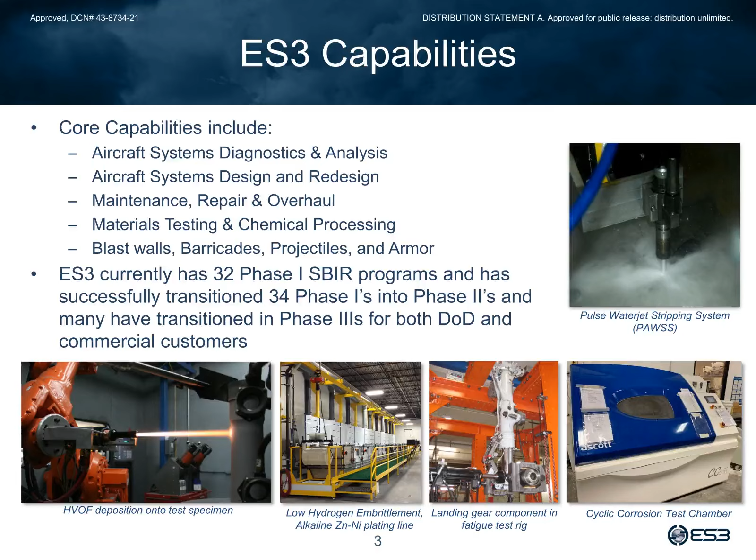SBIR topic N201-X02 is an open solicitation to address the U.S. Navy's need to develop cold spray repair coatings and application techniques for structural and dimensional repair. For those that are not familiar with cold spray, it is a dynamic gas metal deposition process. It is a non-traditional thermal spray process in that it's non-combustion.

It uses kinetic energy to basically ballistically impinge a coating onto a suitable substrate. Metal powders are accelerated by injection into a specially designed nozzle that creates a high velocity stream of gas. And through that kinetic energy, you can actually apply those coatings to whatever targeted substrate you want.

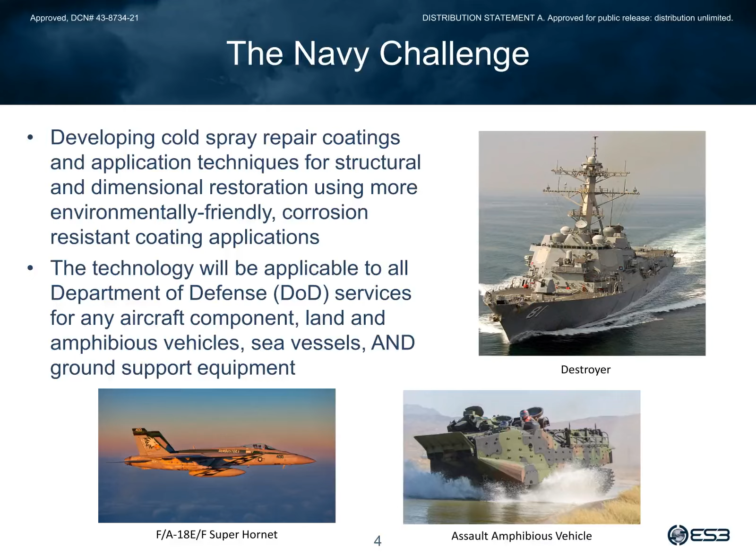This technology is taking the DoD and the commercial industry by storm, and it allows you to make repairs on components that are typically not salvageable.

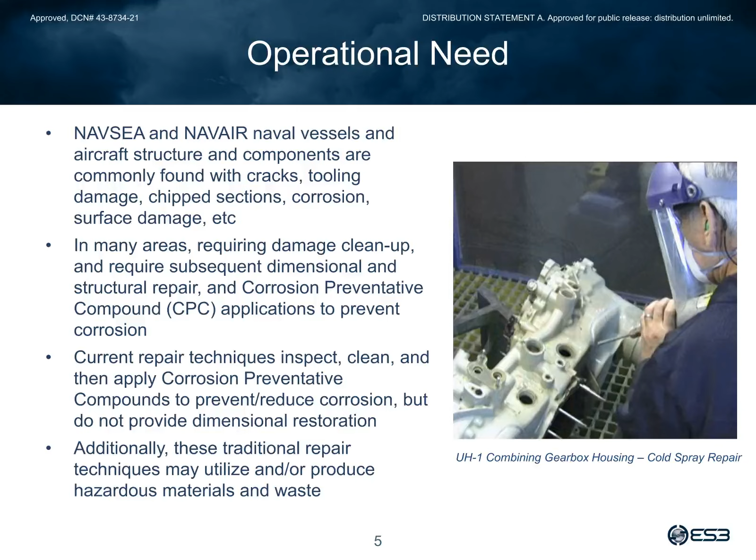This slide lists a few of the operational needs that this cold spray process addresses. Everything from dimensional restoration, structural repair, and even corrosion protection. In many cases, you'll have damage to aircraft components, ship components that require cleanup, and then a subsequent corrosion preventative compound. But you really don't have the means to restore the dimensional or structural integrity of the part. Well, this technique will allow you to do that and do it in a manner that's environmentally friendly.

Now, as we continue to see cold spray application and usage grow within the DoD, we are seeing an increased utilization of gases, particularly helium. Helium has become the primary gas utilized with high pressure cold spray systems as it facilitates increased gas velocity, which allows applications of heavier metallic powders such as your tungsten carbides, your steel alloys, etc.

It also has shown superior performance for application of aluminum powders when you compare it to using nitrogen. This is particularly important as users are seeking to get structural credits from the cold spray application. The problem with helium, it is very expensive, making some cold spray repairs cost prohibitive. And then there's always the risk of having supply issues interrupted with the helium.

To mitigate this problem, ES3 has developed a gas mixing delivery system which will allow the user to combine helium and nitrogen gas, which will thereby reduce helium usage and still maintain good performance on your coating.

The slide shows a photo of the system that we designed and developed that can be used as an external delivery system with any user's cold spray system. The system has automated controls and HMI that allow the user to simply punch in whatever desired mixture ratio they want and then go to their respective system and turn it on. Now, this is a floor model that is shown, but this can easily be augmented into a portable system that can go out into the field as well.

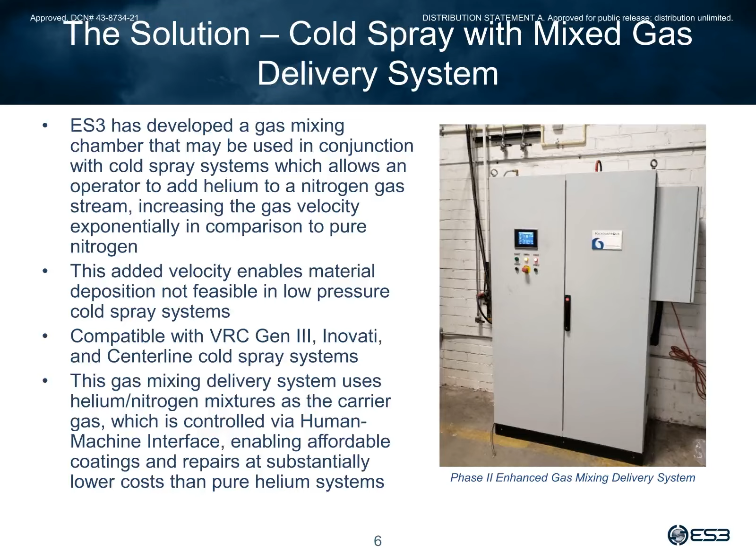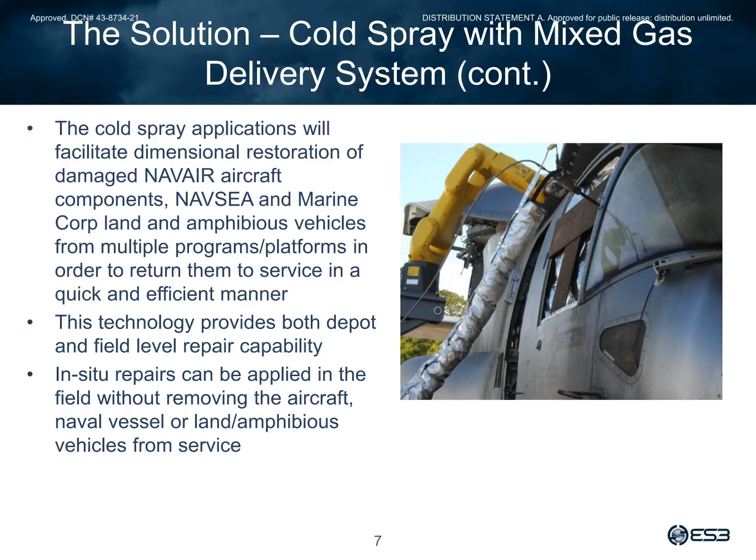The mixed gas delivery system will enable more affordable cold spray repairs by substantially lowering costs compared to pure helium usage. Some of our earlier studies have shown that with as little as 25% reduction in helium usage, we can reduce total cost per minute by more than 50%. This will surely help push the technology to more widespread usage for both depot and field level repair capabilities.

This slide lists some of the features of the cold spray system and the associated advantages and benefits. First feature is portability. The cold spray process allows you to do dimensional restoration or structural repairs on aircraft, including in limited access areas. So this provides a huge benefit to the end users because now they have a repair capability that can be used both at the depot or at the field level.

The second feature is lower application temperatures. With the cold spray process, you can deposit coatings on substrates at much lower temperatures than typical thermal spray processes. With the lower temperature, you eliminate some of the thermal effects and other oxidation, metallurgical transformations that could result from higher temperatures. The huge benefit here is that it allows you to now deposit coatings, both metallic and non-metallic materials, on a diversity of different substrates.

Lastly, there's the mixed gas delivery system. As I discussed in the previous slide, this is where you can now use helium and nitrogen mixtures as a carrier gas in conjunction with the cold spray system. This is going to make your coating process more affordable by reducing your costs associated with pure helium systems.

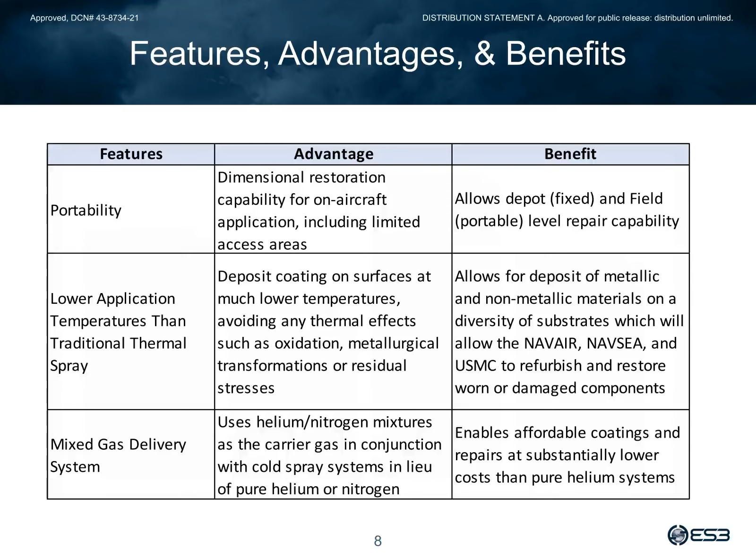Here is the current status of this SBIR effort. We have completed development of the test protocol and designed and manufactured the cold spray mixed gas delivery system. Parameter optimization has been completed on the initial substrates identified by our TPOCs, and we have manufactured test coupons. We are currently in the process of conducting all the validation testing.

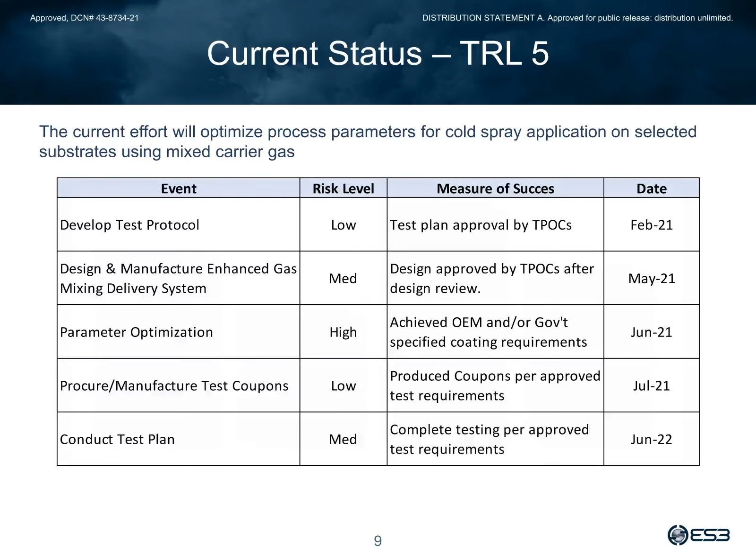So how do we transition this technology to the fleet? Our strategy for transition and implementation is pretty straightforward. The first step is to identify applications with our TPOC. This is the groundwork that has to be done up front to identify what applications are out there for our customers, looking at their platforms, seeing what kind of typical damage they're seeing, and then trying to determine if there's a cold spray solution for those applications.

Once we've identified these applications, we need to develop parameters for the family of materials to ensure that we're going to get consistent results with the cold spray process. Once we have developed parameters, we'll go through and complete our validation testing, which is currently underway right now for the initial substrates that have been identified by our TPOCs. Finally, once we have solid test data, we'll go through a demonstration and validation process on actual components to prove out the technology.

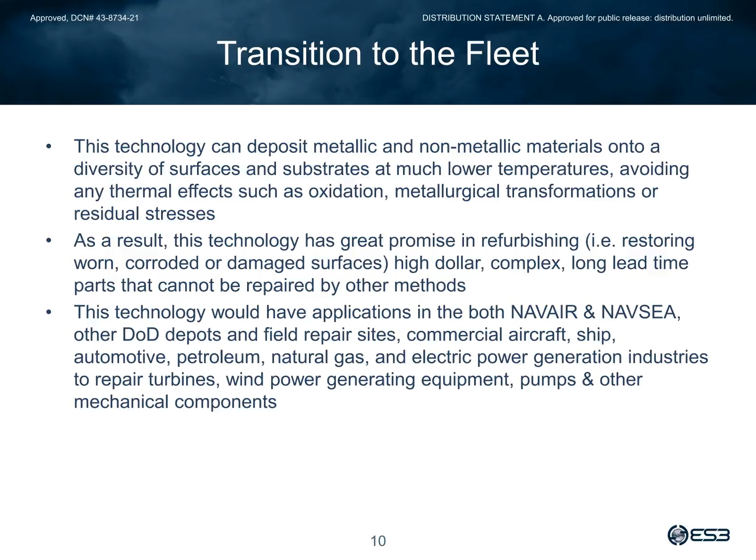Moving forward, ES3 will continue to transition and implement this technology to help build organic capabilities within the DoD. This includes providing engineering support with identification of applications, development of optimized parameters, and the associated validation testing to get these approved for the DoD. As far as the mixed gas delivery system, we're still in need of completing the validation testing for this current effort, as well as continuing to look for system enhancements.

Obviously, we are starting with the DoD as our initial implementation of this technology, but we know in addition to the DoD, this technology is applicable to the commercial, aircraft, ship, automotive, gas and oil, and energy industry sectors. So we will look at engaging these customers in the very near future.